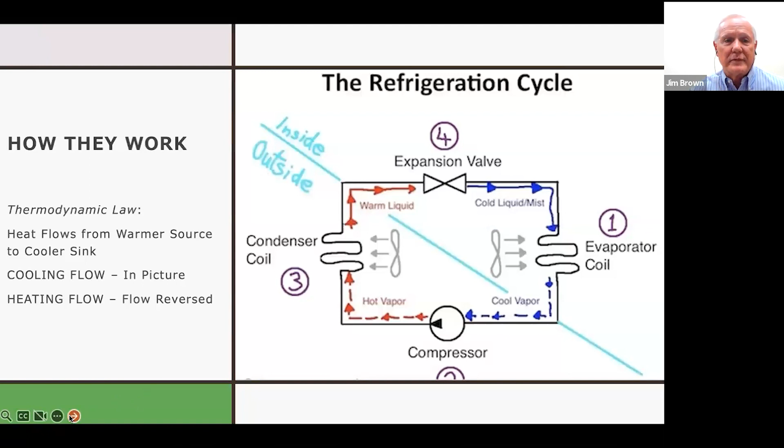Okay. But the question that we have today that we need to not forget about is that we're not really all the way to sustainable yet. We're getting close. Sustainable energy is energy that meets our present needs without compromising the needs of our future, without stealing the fuel or harming the environment for our children.

So are heat pumps sustainable? The answer is absolutely yes. The whole system is sustainable if you're using a source of electricity such as solar, hydro, or wind generated power. However, on the other side, most of our electricity in America is still generated by carbon-based fuels. And if the electricity is coming to us from a carbon-based fuel, then we're not quite to full sustainability yet. We'll talk a little bit more about that in just a second.

The other question is, is it geothermal? Well, geothermal simply means heat from the earth, right? So are heat pumps geothermal? Well, in the heating cycle, yeah, they are geothermal, where we're drawing heat out of the water or the ground or the air and bringing that heat into the room. In the cooling cycle, no, not technically. It's not geothermal because the ground has become our heat sink. We're drawing heat out of the room, and heat is being deposited in the earth rather than being drawn from the earth.

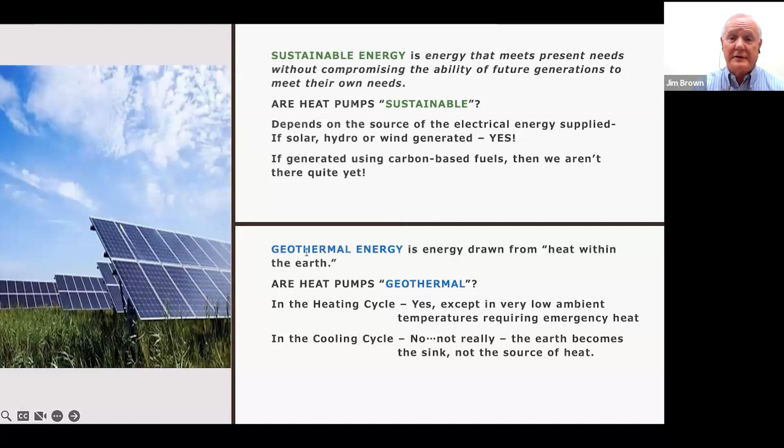I ran over that real quickly. I hope you understand, but it's key for us to know going forward that we still have some way to go here before we can call ourselves fully sustainable. Okay, next slide, please. Okay, it's the same old story, guys. Our electric suppliers over the years have not kept up with consumer demand for sustainability. We still have most of our electricity generated using carbon-based fuels.

Okay, the problem is electric heat is 100% efficient. That electric resistance coil in your house is 100% efficient. But the problem is getting that coal or oil or natural gas out of the ground, running it through boilers to create steam to turn generators, and then distributing that electricity to our households. We lose about 70% of the energy in that cubic foot of natural gas. So the electric companies really only have 30% of their product that they can sell. So as a result, we're energy efficient using electricity, but the cost is higher. All over the country, you will find that the cost of a BTU is somewhere between 3 to 5 times higher for an electric BTU than it is for a natural gas BTU.

So what we're trying to do is get the concept across that site-generated electricity is the way to go, especially for large HVAC plants. If you have a huge church or a huge commercial facility and we could put in a solar panel system that would allow us to produce the electricity that's necessary, then we eliminate that 70% loss and we become most efficient from an energy standpoint and from a cost standpoint. Let's go to the next slide.

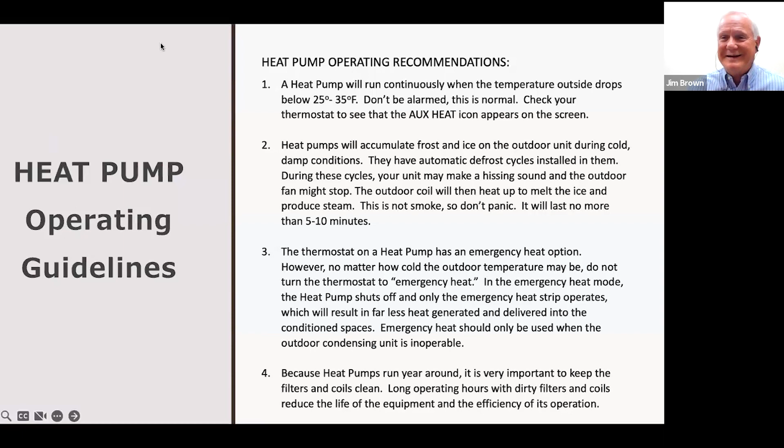So I hope everyone was able to understand how the system works. It's very ingenious. But the heat pump, it is not a new concept. The concept has been around for a long time. We simply need to figure out how to make the overall system sustainable and get away from carbon-based fuel, like natural gas furnaces in your home. Okay?

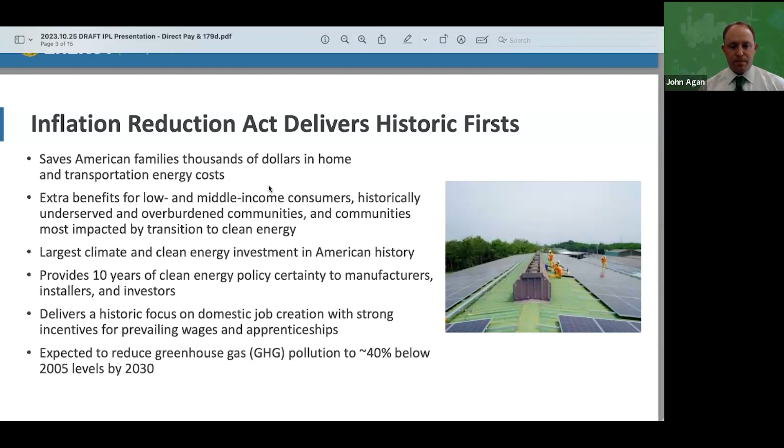The rest of what I'll share with you today is kind of divided into two main parts around two different incentives. The first one is the energy efficient commercial buildings tax deduction. Because these are so often used as shorthand, as you're talking with developers or tax advisors, you might hear them use the Internal Revenue Code section number, which is 179D. Just want to note here that the description of commercial buildings is basically meant to separate these buildings and the incentive from single family residential homes. So it doesn't have to be a place of commerce, but this is a deduction available for non-residential buildings, including houses of worship.

The second one that we'll get to is the investment tax credit. This is section 48, and revisions and expansions that are in the Inflation Reduction Act, including the important provision for elective pay, which allows tax exempt entities to be able to take advantage of the incentive in investing in their facilities. We can go to the next slide.

Okay, boring stuff first. I work at the Department of Energy, and we do a ton of outreach and work on research and development and deployment of these clean technologies. But the Inflation Reduction Act provisions that have to do with the tax code and tax incentives for Americans is the purview of the Department of Treasury and the Internal Revenue Service. So we're excited to talk to you about what's in the law and the broad strokes of what's been released as guidance and made publicly available by Treasury and IRS, but what they write and what they put in their publications are the authoritative information here.

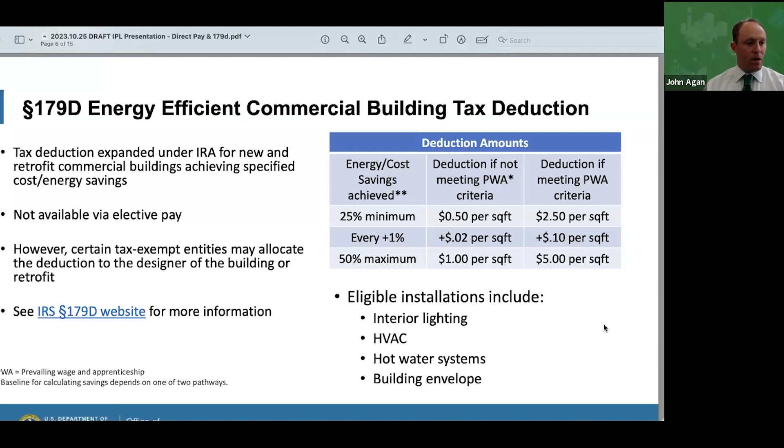This is a summary of some of the things that have changed as a result of the Inflation Reduction Act compared to the historic deduction, but I hope that many of those things are clear and look familiar. Number 3 here is really a key piece of it, that tax-exempt entities are now able to allocate their deduction. And that was previously only available to state and locally owned, government-owned buildings. So that expansion, we really hope, will be a new opportunity for you all and for others across the country.

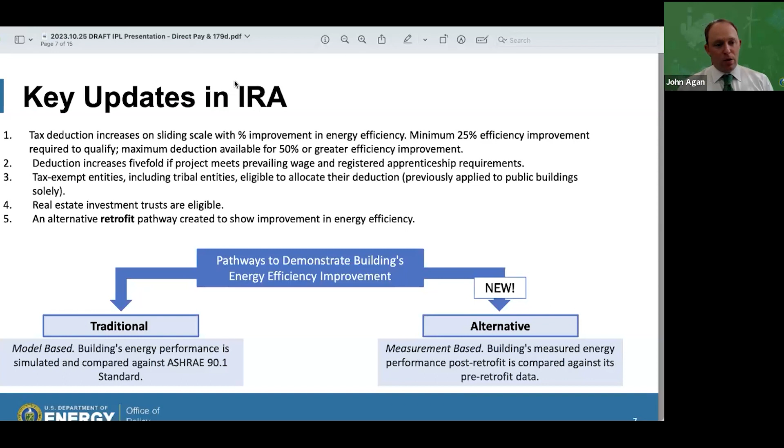And then finally, just want to highlight the graphic below here that traditionally the deduction was based on a standard for commercial building, a new build, which really means that the possible benefit for savings was often only cost effective to pursue if you were building a new building and just were building a little more efficient. Whereas trying to retrofit an old building and get it up above a newer standard would be very difficult.

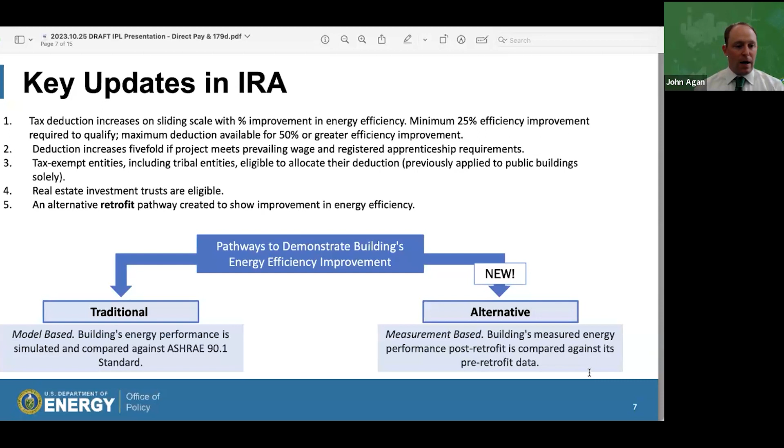So the new pathway here, this alternative pathway on the right, measures savings compared to your previous energy usage in that building. And that we hope will give older buildings with maybe not great insulation and older inefficient equipment the chance to see significant savings and have an incentive for those. If we could go to the next slide. I'll leave these for folks to look at, but this is existing IRS information on the two pieces of this deduction that are currently available.

If we go to the next slide, I'll try to move through this quickly because I want to be mindful of time here. But the other significant incentive and opportunity that we see in the Inflation Reduction Act for you all is the elective pay option. So for a number of the different clean energy tax credits, tax-exempt entities can get a payment from IRS, even though they're not paying taxes. That payment is equal to what they would have gotten as a credit if they owed taxes and were having those taxes reduced. Those can be combined with additional other grants and loans. And there is a process for eligible entities to go through a pre-filing registration. I'll have a little more detail on that in another slide. If we get to the next slide.

Great. So this is a slide we've provided across the country to various communities. The piece I want to highlight here for you all is that the investment tax credit, in particular Section 48, has a 30%. I think I may have seen this in the Q&A briefly as well. This is a 30% credit for certain types of clean energy investments. That includes clean electricity on site, including solar, includes battery storage. It also includes energy efficient technologies, including geothermal heat pumps. So ground source heat pumps in particular are eligible for this credit and the elective pay option. Air source heat pumps are not, and they're best considered for 179D. Will you go to the next slide?

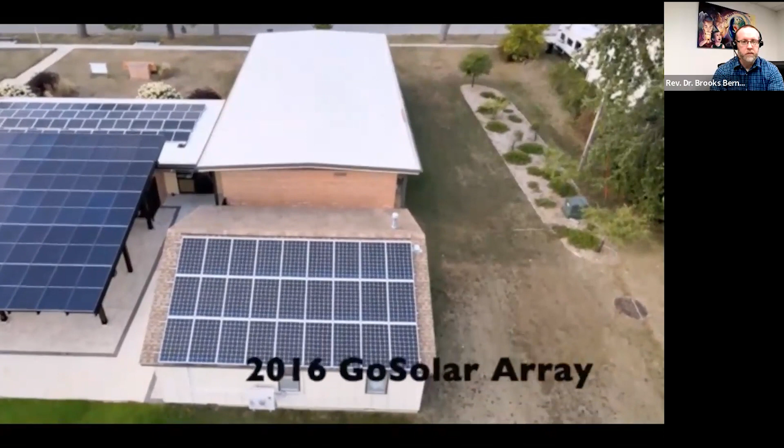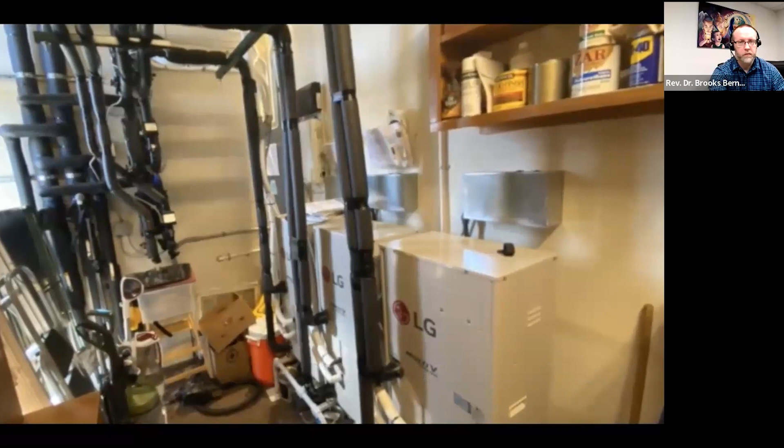By 2018, the original 8 natural gas furnaces had begun to fail, and the congregation undertook a major renovation of the original education wing. This included installing 4 5-ton geothermal heat pumps to replace half of the gas furnaces. These heat pumps were supported by a large geothermal field in the backyard consisting of 15 horizontal bored loops.

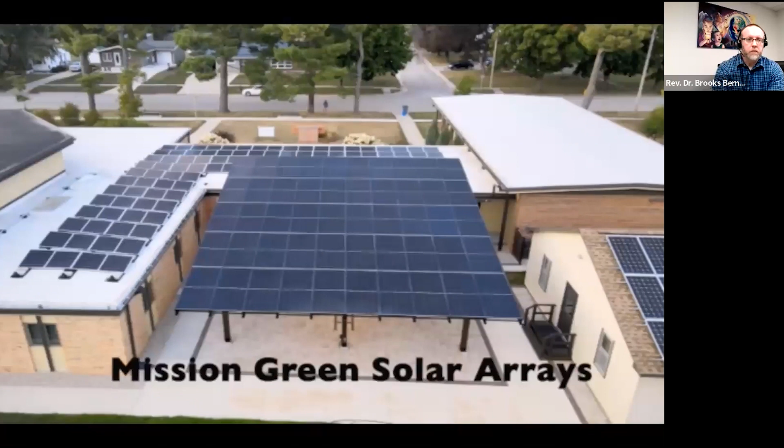In 2022, Good Shepherd members Jim and Liz Fritz formed a company, Mission Green LLC, to help the congregation replace the 4 remaining rooftop furnaces on the sanctuary. Mission Green proposed to add additional solar, including a solar array on a pergola as well as a rooftop solar array on the education wing. The rooftop array included 52 bifacial panels generating 21 kilowatts of energy, while the pergola array featured 50 bifacial panels generating 27 kilowatts of energy.

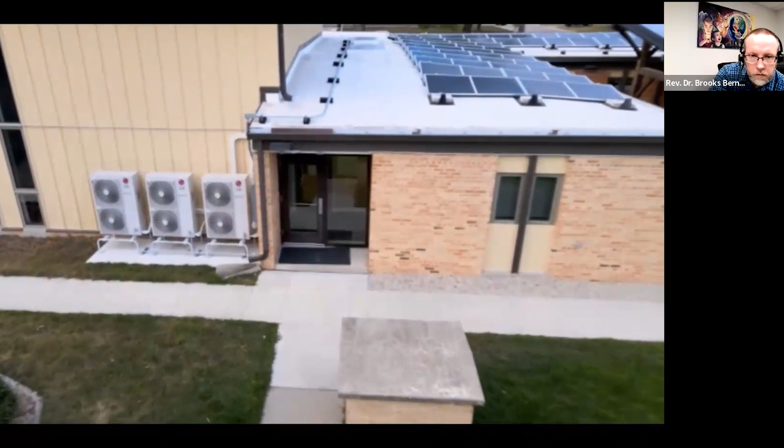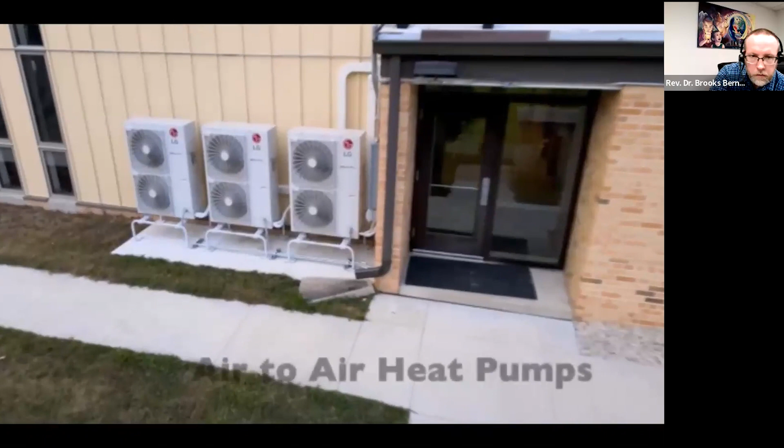The original building was heated with fuel oil until the 1960s when natural gas became available. The old fuel oil barrel was removed during the Mission Green project. 3 5-ton air-to-air heat pumps were installed outside the sanctuary. Variable refrigerant flow lines run through the building to individual indoor units. Every room in the entire facility is zoned individually for heating and cooling.

The congregation also committed to planting more trees in our green space. In the past 5 years, we've planted over 40 trees and bushes to lower our carbon footprint. Our church garden, tended by congregation members, supports our local food pantry. This dark brown grassy area will become a 4,500 square foot pollinator prairie using wildflowers native to the Iowa tall grass prairies. This eliminates a lot of useless mowing and lowers our carbon footprint. It will help support butterflies, bees, and other pollinators vital to our planet's ecosystem.

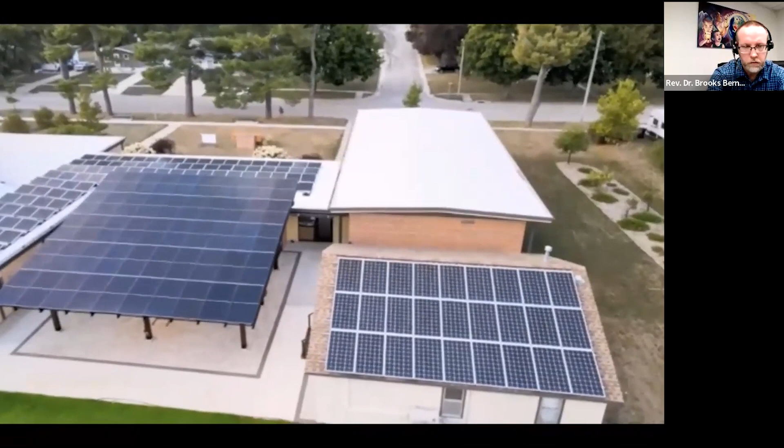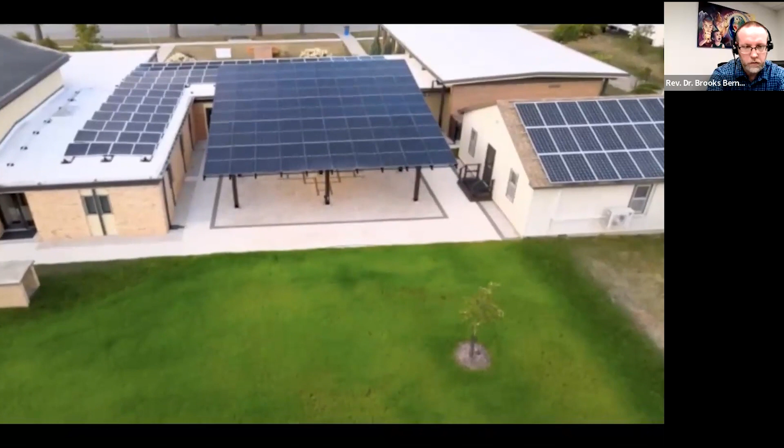Climate change is real, and we've experienced significant drought this summer. The back lawn still needs much reclamation following the construction project done by Mission Green. We hope our entire lawn looks this green next spring. The pergola is a post and beam construction by a local craftsman and utilizes Douglas fir timbers. The racking system for the pergola solar array is an innovative black anodized aluminum product that provides a watertight area below.

The permeable paver courtyard, located just outside of our fellowship hall, sits atop a huge French drain to handle all the rooftop runoff that had been problematic in the past. It is made up of over 200 tons of crushed gravel. The stylized cross in the courtyard center is an homage to the original cross designed for the 1958 building. It fell into disrepair and was removed. Now it's back. The members of Good Shepherd have been solid supporters of this project. A congregational vote to approve the collaboration with Mission Green passed by an overwhelming 99-4 majority.

We are all proud of our efforts to move the needle to mitigate climate change and end the use of fossil fuels. Our facilities are now 100% electric and carbon neutral. We are a net zero energy facility as we generate sufficient power for all of our needs on site with 56 kilowatts of solar and 110% net metering with Alliant Energy. We continue to strive to lessen our carbon footprint. Following a 6-year power purchase agreement and a lease with Mission Green, the congregation will own all of the new equipment. This will allow the money previously spent on energy costs to be used to further the church's mission. We hope this model will inspire others to join us in the quest to save the planet.